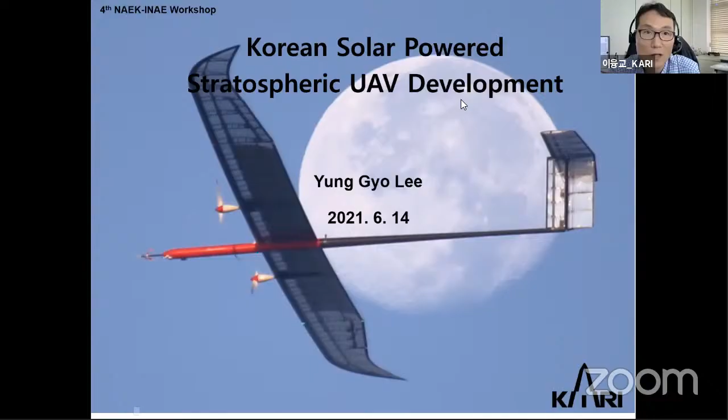Why do we use solar power for HALE UAV? For long endurance and eternal flight, regenerative solar energy is essential. Also at high altitude, electric motors have no performance degradation, so we use electrically powered systems like battery, fuel cell, and solar cell. Our UAV will be used for telecommunication in the stratosphere, weather observation, disaster response, and border watch.

In other countries, EADS developed a vehicle that flew 25 days in Arizona in 2018. It is designed for internet service with laser communication. Its wingspan is 25 meters, and solar cell and lithium-ion battery are used.

Also, HAPSMobile designed the Sunglider. The purpose is also telecommunication, and last year it succeeded in telecommunication at the stratosphere. Its wingspan is 78 meters, and solar cell and lithium-ion battery are used for the power system.

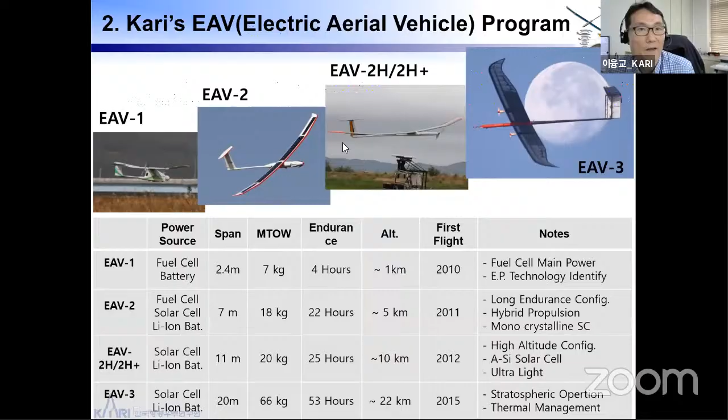This is EAV1. The power source is a fuel cell. The purpose is technology identification for aircraft electric propulsion. We modified this from an existing platform, from lithium-ion cell to fuel cell.

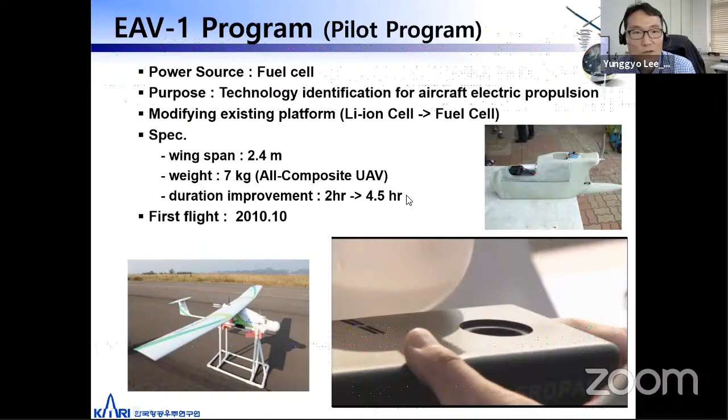The wingspan is 2.4 meters and the weight is 7 kilograms. It's all-composite UAV; all EAVs are composite UAVs. The duration improved from 2 hours with a battery to 4.5 hours with a fuel cell. The first flight was done in 2010.

This is the fuel cell and also the hydrogen generator. Adding water to a boron compound will generate hydrogen. So we use a bungee

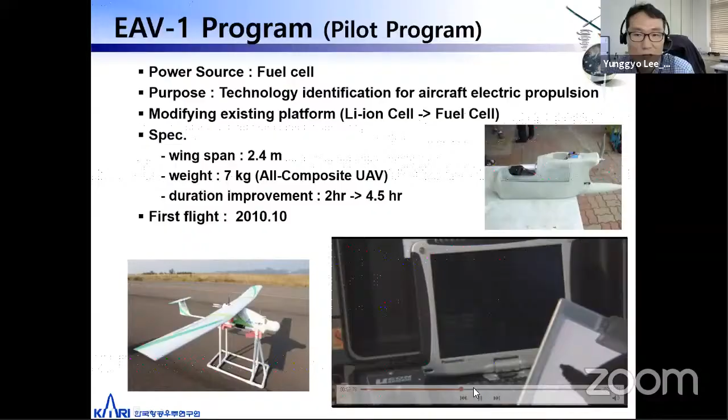takeoff like this to reduce runway usage. So EAV, all the EAVs, don't have any landing gear, so it just uses a wire skid under the fuselage and under the wing.

This is EAV2. The power source is solar cell, fuel cell, and lithium-ion battery. The purpose is a concept demonstrator of a hybrid power system. The wingspan is 7 meters, weight 18 kilograms, and duration is 22 hours.

The first flight was in 2011 - this is a typo. And in 2012, it flew for 22 hours and 13 minutes.

EAV2 also doesn't have any landing gear, so it lands with the wire skid under its wing. The speed is so slow, so there's no damage when it lands like this.

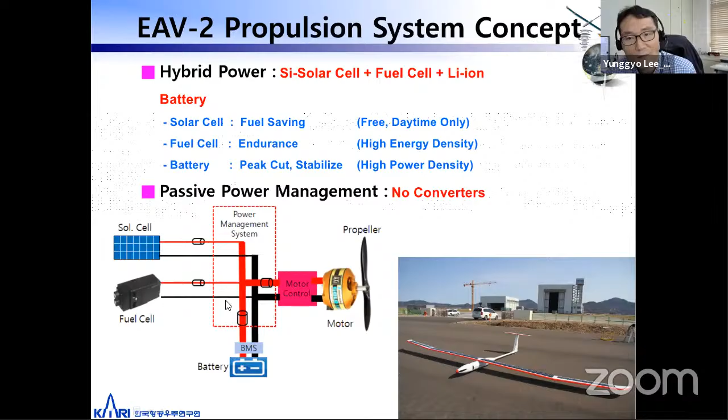Ground tests consist of these things: prop wind tunnel test, solar cells on the wing deflection test, and the power system, also a 24-hour integration test.

Now this is the 2H program. H means high altitude. Power source is solar cell and lithium-ion battery. This is a concept demonstrator of a HALE system. Wingspan 11 meters, weight 20 kilograms, duration is 25 hours.

EAV2H is a single-prop version, and the 2H Plus is a twin-prop version. The first flight was in 2012, and it flew 25 hours in 2013.

Other EAVs used a monocrystalline silicon solar cell, but in this version it used an amorphous solar cell on Mylar wing skin. It has a low-drag aerodynamic design, and ultralight structures were also applied.

Also, 18650 battery is used. The energy density is about 210.

Ground tests are like this: structural load test was done for the wing, air data system calibration was done in the wind tunnel, propeller wind tunnel test was done, and a 24-hour integration test was also performed. It has used omnidirectional combined antennas.

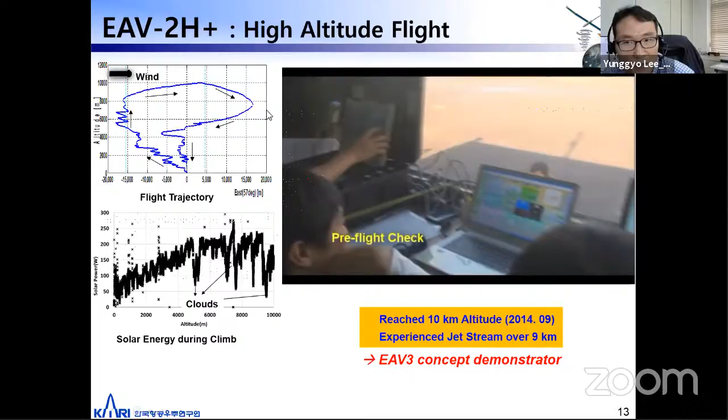Now this is EAV2H flight to 10 kilometer altitude. So it reached 10 kilometers in 2014, and it experienced a jet stream over 9 kilometers in Korea.

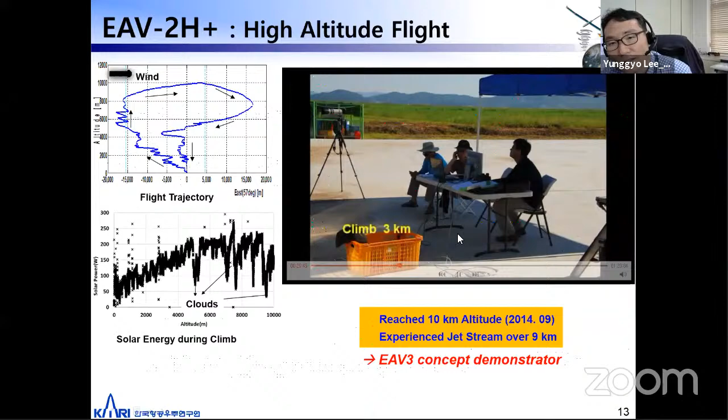This is EAV3 concept demonstrator. We have the camera on board, and some pictures were recorded on board.

Now this is the EAV3 program. EAV3 uses solar cell and also lithium-ion battery. The solar cell is a single monocrystalline silicon solar cell. The purpose is stratospheric operation, and we have constructed 3 EAV3. This is the spec of number 3: wingspan 20 meters, weight 66 kilograms, max altitude 22 kilometers. The speed is from 25 to 43

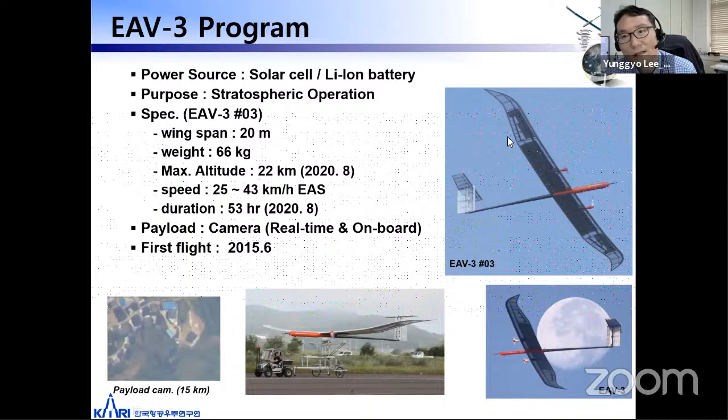kph EAS. The duration was 53 hours last year. The EAV3 0102 - this is the EAV3 0102. The EAV3 03 has more solar cells, also a bigger fuselage.

One is a lithium-ion battery made by Amprius of USA. It has about 390 watt-hour per kilogram of energy density. And the other version used lithium sulfur battery made by LG Chem of Korea. It has an energy density of more than 400.

Through the component environmental test and also BLDC motor development, and also high altitude propeller design, the EAV3 has flown to 22 kilometer height. The test condition was negative 70 degrees Celsius, and the pressure is 1/20th of sea level

atmosphere. The solar cell panel is tested in the environmental chamber. Also, battery cell and the pack inflate and deflate during the flight, so they have gone through pressure testing in the pressure chamber.

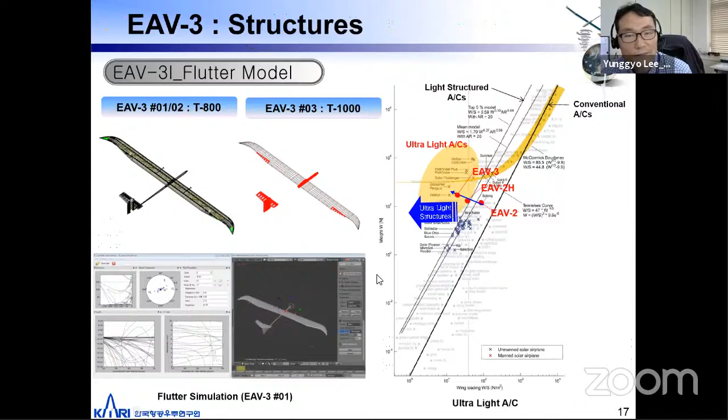Okay, we also went through the flutter simulation. Also, we did a steady load test, propeller wind tunnel test, and also double redundancy air data system. We have 2 AOA sensors and 2 AOS sensors and 2 pitot-static systems. And we have gone through the durability test.

In the stratosphere, temperature is negative 70 degrees, pressure 0.05 bar, and density is 1/15th of mean sea level value. So in the lower part of the stratosphere, the temperature grows up when it climbs up.

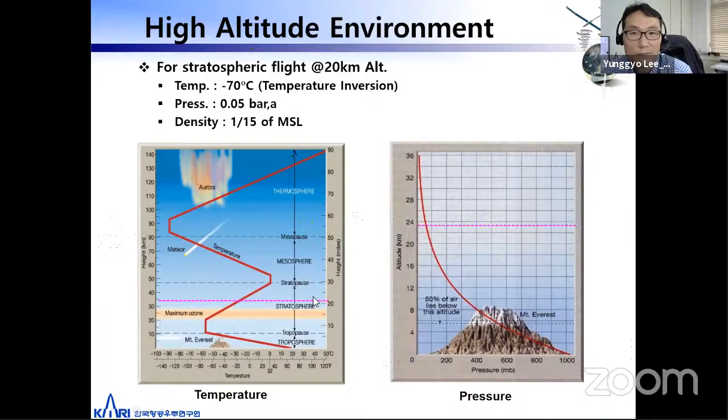Now let's enjoy 2 minutes of video. This is flight testing. This is our Goheung Aviation Center.

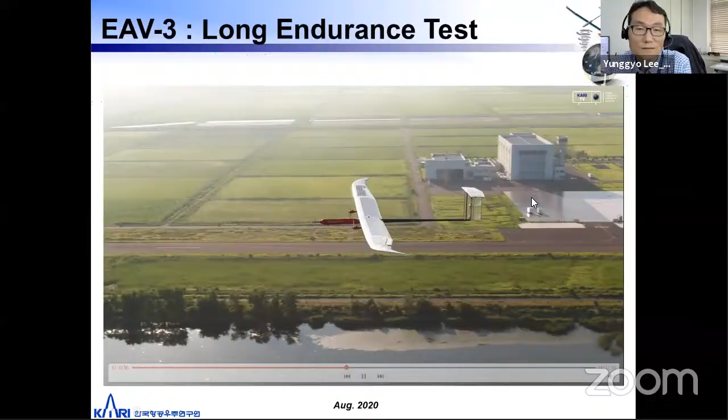Tracking antenna for C-band communication.

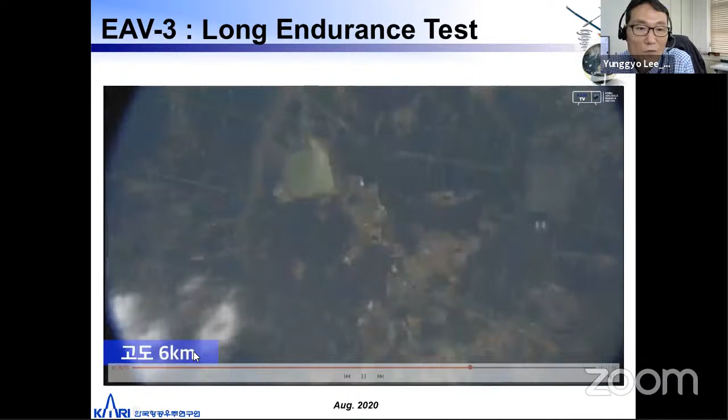Altitude 6 kilometers, from onboard the camera.

Okay, the ground control system is like this. The altitude is 18.5 kilometers, we have reached it. Also, propulsion system monitor, the onboard camera, and Sorok Island taken from 18.5 kilometer altitude.

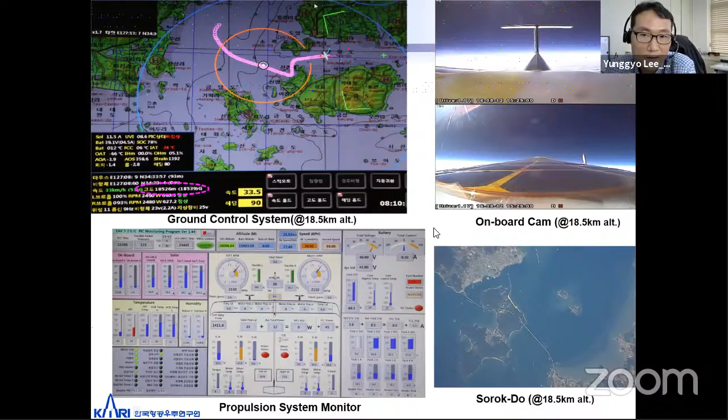Now, the achievements from EAV1 to EAV3: the endurance from 4.5 hours to 53 hours, and also the altitude from sea level to 22 kilometers last year. So we have made many achievements.

Now, EAV future plan. Next step for year 22 to 25 is planned. The target is a 1 month continuous flight over 12 kilometer altitude, totally in stratosphere. The wingspan is 30 meters. The weight should be under 150 kilograms. The payload is enlarged, it's 20 kilograms. It's a kind of a very big payload for this type of aircraft.

And we will apply satellite communication for wider area operation. To do that, we have to minimize power consumption, and also weight reduction is very critical. So structural weight reduction should be under 50 kilograms with a 30 meter wingspan. To do that, new structural concepts should be applied, and also T800, T1000, or maybe hopefully T1200 carbon fiber we will need.

I'm going to talk a little bit about some of the work that my students and we have been doing here at the Indian Institute of Technology, Kanpur. This picture is from one of our very iconic buildings, the Central Library, which was also released as a postal stamp some time ago.

As you may be aware, India has done quite well in at least two domains, nuclear and space. As was also mentioned in the opening remarks by the Honorable President, we launch satellites for other countries as a commercial venture, so it's a fairly successful program. One of the key things is the low cost, which is an advantage.

There's always this tussle between rockets versus air-breathing engines. Rockets are a little bit easier to put together, but with air-breathing engines you have to collect air, undergo combustion, and then perhaps also reuse them. Just to give you a number, air-breathing engines overall can be about 80% lighter, and therefore they offer a very economic advantage over rockets.

So India has a very ambitious program to go ahead with a two-stage to orbit system, wherein you take off like a space shuttle, and there are two stages. At some point, you jettison one of the stages, and it comes back and lands as an aircraft. The other part actually goes ahead, and then you can deploy a satellite. Once that is done, that also is retrieved, and the system is completely reusable.

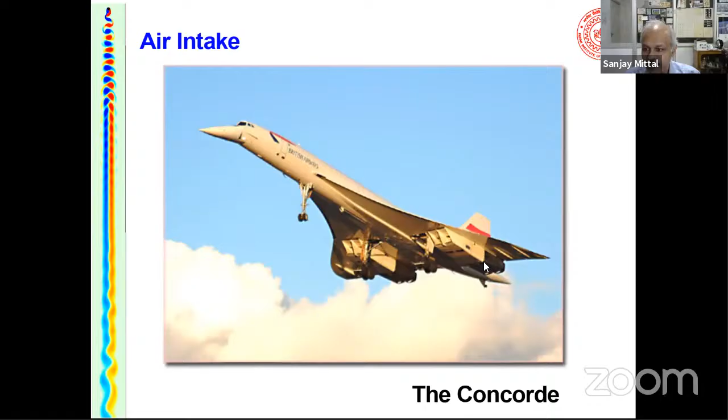They are passive devices wherein they just collect the air from the atmosphere and transmit that to the engine. So it seems very simple. Here is a close-up view of these 2 intake ducts.

The challenge for an air intake is the following. First of all, I have an engine at the downstream end of these intakes, so I must have almost a uniform flow at the engine. Otherwise, there could be heavy distortion of flow, and that would lead to loss of efficiency.

The second one is that I must slow down the air so that I can have combustion inside my engine. If my aircraft is traveling at a very high speed and I allow the air to get into the combustion chamber at that high speed and put fuel in it, I will not be able to stabilize the flame. The flame will blow out, just like a candle will blow out if you put the candle on top of a truck and speed your truck. So essentially you have to slow down the flow that comes into the combustion chamber so that you can have efficient combustion. That's the job of an intake.

Again, two jobs: one is to supply air of enough mass flow rate at low speed, and the other is flow uniformity at the engine.

Here is a schematic of what a typical reusable launch vehicle which uses air-breathing propulsion would look like. On the vehicle at the belly, there would be this engine, integrated with the aircraft. Through a set of shocks shown in this schematic, the flow slows down, and then you probably have another set of shocks.

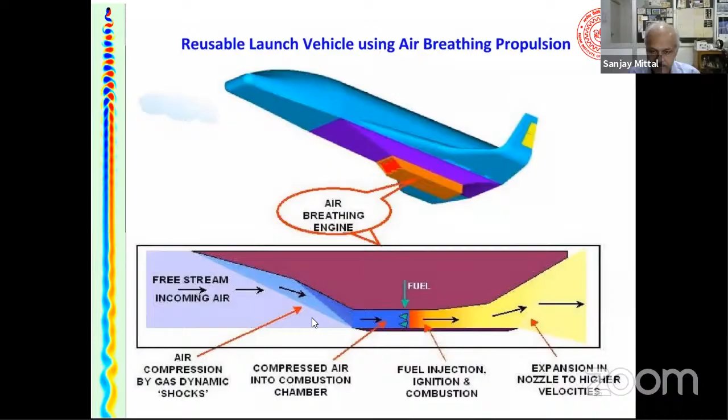There are several types of air intakes in aircraft engines. There could be an external compression intake, wherein the shock systems are completely outside the engine and they slow down the flow. Or you could have a completely internal compression system wherein all the shock structures are inside the intake. And the most likely one to be efficient at high Mach numbers is the mixed compression, wherein you would have a mix of both external and internal compression.

So I'm going to show you some results for our analysis of a mixed compression intake, which offers a very good potential for these flight vehicles.

Before I do that, I just wanted to show you some ideas of operation of these intakes. Here is the schematic. There is a high speed flow coming in from left to right, and this is the center body of the engine, shown in purple color.

So you have these shock systems where the flow slows down. This region we call the throat because this is the minimum area region of this device. That's called the throat, as the name suggests. We would typically have a normal shock somewhere in this system, and we would like it to be as weak as possible to reduce the losses.

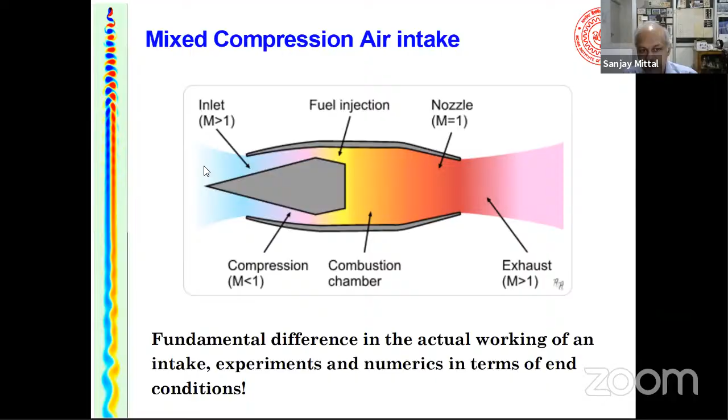Being a university, we chose a geometry available in open literature. This was tested long ago by NASA. It's a double ramp intake, a 7-degree ramp followed by a 14-degree ramp. This is the cowl, and this is the ramp, with flow going from left to right.

The first calculation was done assuming no viscosity, so we used Euler equations. Some finite element calculations were carried out, and we obtained a flow. Then we carried out viscous calculations by turning on the viscosity, and what was found is that the viscous effects really cause a problem in this flow.

There is massive separation because of this shock, so the boundary layer separates. The color coding here is red denoting high Mach number - that's 3, the inlet Mach number - and blue is close to 0, with shades in between.

So you get massive flow separation, and very little mass flow rate through the engine, even when the outflow is supersonic. We have not even applied a back pressure, so there is no combustion right now, and still this is not performing well.

One way to resolve this problem is to use boundary layer control. Typically what is done is there are some holes in the ramp and the cowl - it's a porous material - and you remove some air from this, perhaps using it for air conditioning or cooling. By doing that boundary layer control, you can actually prevent the flow separation.

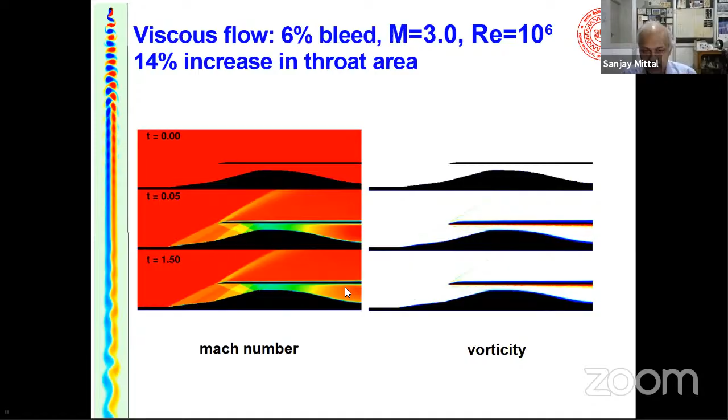And in fact, your engine will not be able to generate thrust. So this is a big no.

So you want to analyze how well your intake is performing for different bleed ratios, for example, and other conditions. If you're willing to do a very high bleed, let's say a 27% bleed, then your engine would actually do quite well at very high back pressure ratios. But then if you go beyond a certain number, the mass flow rate is extremely poor.

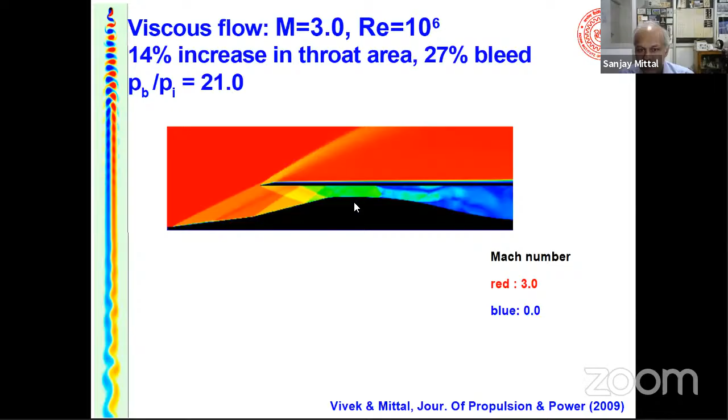So I want to show you one case which is on the verge of being unstable. You can see here it is very close to the critical operation. That's the throat of the engine. There's a back pressure. As you'll notice, we're applying bleed, so there are very small Mach waves on the ramps. But more or less, the flow upstream of the throat is steady. But then there's major flow separation and unsteady activity downstream, and you can see these shocks which are kind of dancing back and forth. But it's still okay. This is a reasonable situation, and the pilot can still use the aircraft.

If you increase the back pressure even further, you can get an instability which is typically called buzz. Just to demonstrate what a buzz looks like, I'll create a sound - it's almost like a honeybee creating a buzz, bzzz, something like this. So it's the shocks traveling back and forth. Essentially, the whole duct of the air intake acts like an organ pipe, and you can get standing waves which lead to this acoustic response. We have two kinds of buzz, a little buzz and a big buzz, and both are driven by superharmonics of these modes shown here in the pipe.

So here is an example of a little buzz. Notice we started off with a low back pressure ratio, and then as soon as the back pressure ratio was increased, this mass flow rate with time shows a very periodic type of response. You get a high mass flow rate, then it becomes low, then it rises again. So it's a very periodic activity, and that's because these shocks are going back and forth.

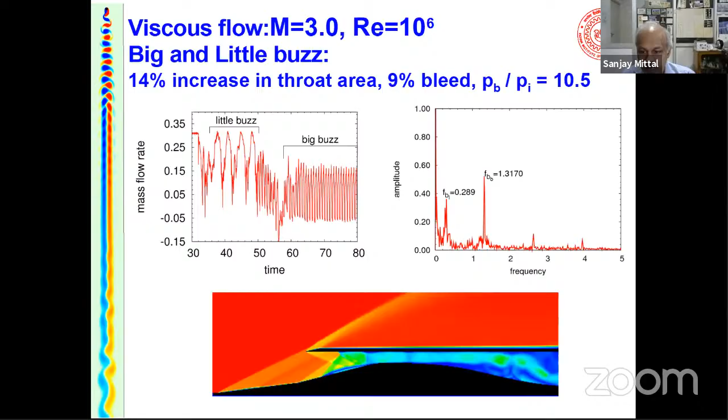You could also have a situation wherein you could have a big buzz and a little buzz following each other. So this is an example of a little buzz followed by big buzz. Initially you would have a low frequency response, and then eventually you would get a high frequency response of the mass flow rate through the engine and the related forces.

I have a few more minutes left, so I'll just very quickly show you some other intakes that we are doing. There are other intakes in aircraft that are used, for example, the Y-duct intakes. You could have a situation where you have one engine being supplied by two air intakes, much like our nose, where we have two nostrils supplying one air column. Or of course, you could have two curved ducts supplying one engine each.

So simulating air through these curved ducts is yet another challenge of how you supply the air to the engines efficiently. So we chose this model problem of two ducts which are joined together at the merger section.

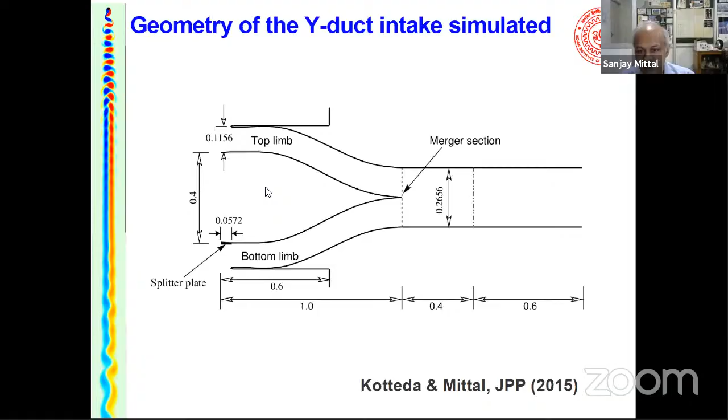And then we are going to look at the effect of the pressure ratio. The engine is located downstream and the air comes from the left. We are interested in what happens at different side slip angles when the air is not coming directly, when the aircraft is side slipping, and of course different pressure ratios.

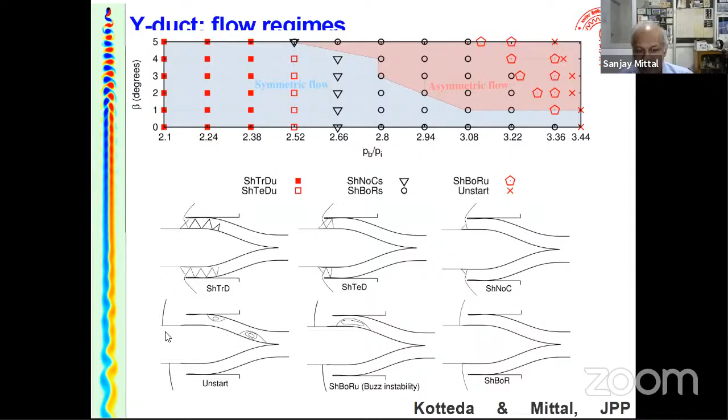And this would lead to a buzz instability, wherein flow would come in through one of the ducts and actually leave through the other duct. And finally you could get an unstart. So again, you don't want to be in this regime.

So here, the side slip angle is 5 degrees. The aircraft is actually at a side slip angle, so it's getting more mass flow rate through the lower limb as opposed to the upper limb.

Here is a close-up picture of that situation. As you will notice, flow comes in through the lower limb, and in fact it curls around and leaves through the other limb. So one of the limbs shows a negative mass flow rate, while the other shows a positive mass flow rate, and you get very little flow through the air intake.

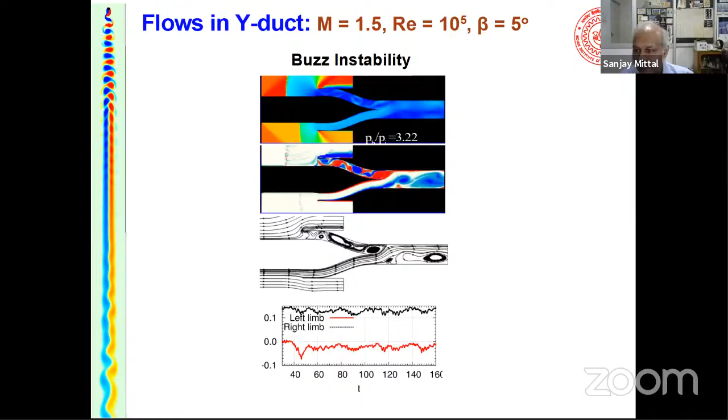And this is not recommended for a real operation, but as a design engineer, you would like to know how the intake behaves so that you can avoid these uncertainties even in the testing phase.

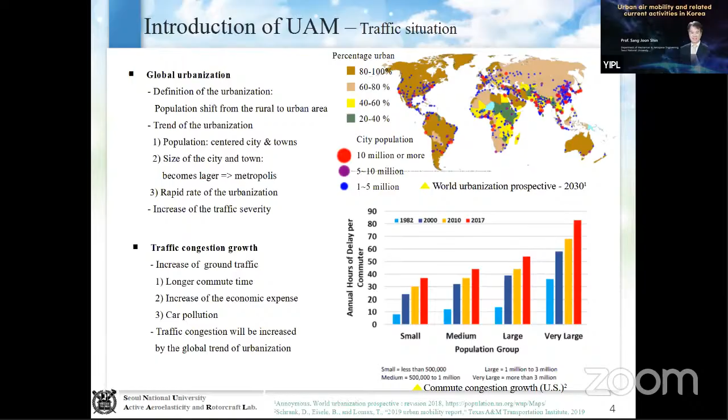Now I'd like to introduce some activities currently initiated in Korea. People in Korea started the business about eVTOL and UAM. They started the business about UTM, the UAS, unmanned air system transportation or traffic management. It's been a few years since they started new research plans and projects about this UTM, and by now they've made significant results in developing and establishing it.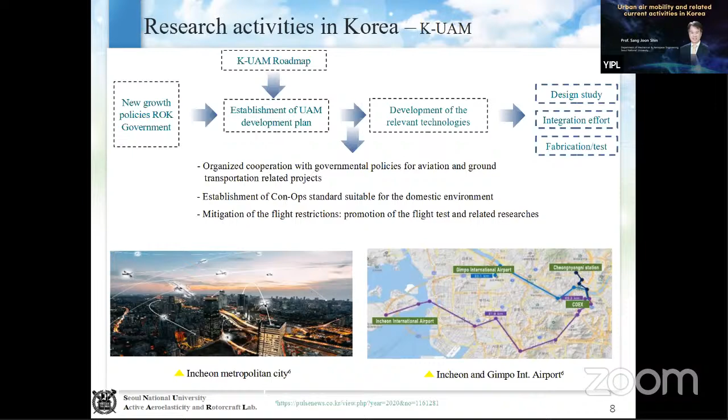Now there are a few activities directly related to UAM or eVTOL in Korea, either in government sectors or private sectors. As a matter of fact, it is quite famous and prevalent, this new transportation in Korea, but the government effort or financial plan is not clearly established yet.

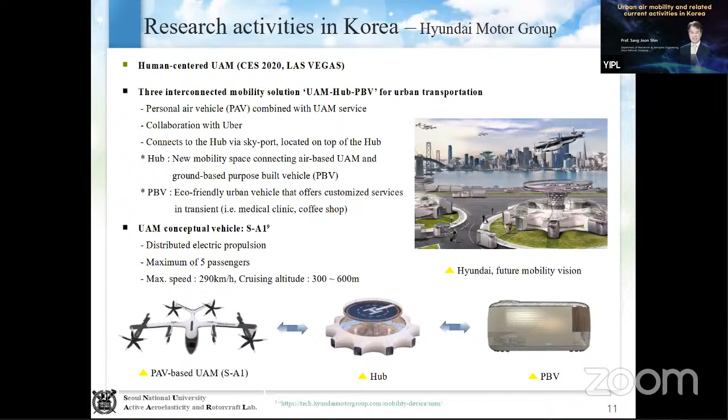The other industrial effort done in Korea is by Hanwha Systems Incorporated, in a way quite similar to Hyundai Motor Group. Hanwha Systems built a common invested corporation in the United States and has been collaborating with an international industry there, building a new prototype called Butterfly. Their plan is to complete it within the next few years, and as well as flight vehicle development, they will also make efforts on regulations.

Those are examples of what's been going on in government sectors and industrial sectors in Korea. But even though it is quite small and in the beginning, in academia, Seoul National University started a new research project related to UAM.

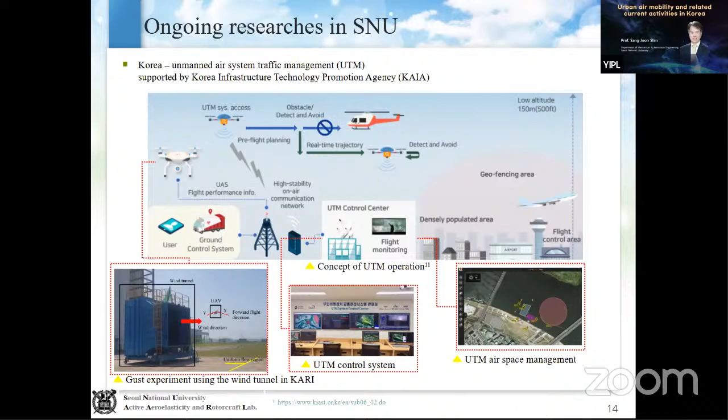The other one is a new research center recently approved by the Ministry of Science and ICT in Korea, mostly focused on flight vehicles. Six universities will be joining in this seven-year research program, and there also exist international collaborations with Boeing, Airbus, and NASA Ames.

Under that program, the aspects within vehicle technologies will be focused on, and the seven-year research period will be separated into Phase 1 and Phase 2. During Phase 1, basic research efforts will be attempted, and during Phase 2, those various aspects will be collaborated and integrated, focusing on a final prototype designed using artificial intelligence based simulation programs.

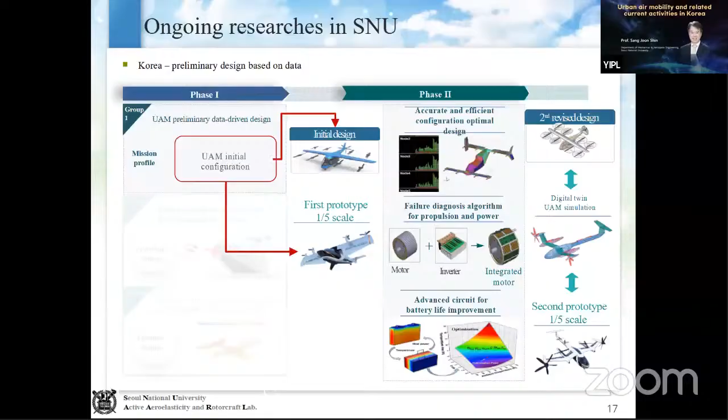Under that Phase 1 and Phase 2 program, many different disciplines will be expanded and integrated in the final result, such as preliminary design, aerodynamics, structural, vibration, acoustics, and flight condition controls. These efforts will be collected and collaborated with the existing UTM activities going on in Korea.

As you see, the eVTOL or UAM aircraft vehicle will be similar to rotorcraft in terms of vertical takeoff and landing, and many existing technologies related to rotorcraft in Korea will naturally and automatically be merged into this effort.

And this is the final construction of the ideal and imaginary flight vehicle, which will be done by the integration of all those efforts inside the research program.

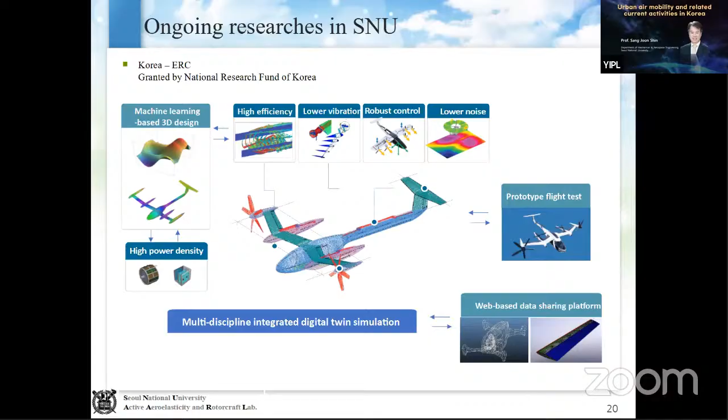Now this is the small conclusion of my presentation this afternoon. Even though the aircraft and flight vehicle is an integration of many different disciplines, many other research efforts will be required, such as infrastructure, regulation, and operation. Within the research center and within Korea, there are many activities and research plans being done in relation with UAM and eVTOL.

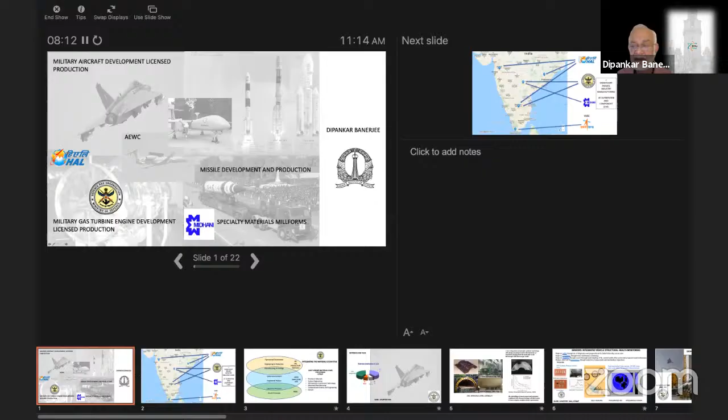Okay, right, now it's moving.

These organizations are based primarily in the southern part of India, in these cities. They're all supported by significant private industry manufacturing, both at the subsystem and component level, but systems design is done essentially by our government organizations, such as HAL, DRDO, and the Indian Space Research Organization.

We have made significant efforts to integrate the materials ecosystem, that is, integrate manufacturing technology and engineering to production, with the systems development environment and with laboratory research in several areas. The Aeronautical Research and Development Board of India supports this integration through research programs which address structural materials, surface engineering, life extension science and technology, advanced manufacturing, computational modeling support, and sensors.

Our flagship program of the Defense Research and Development Organization and HAL is our light combat aircraft program, also called the Tejas. This aircraft is called the Tejas. It has received full operational clearance from the Indian Air Force.

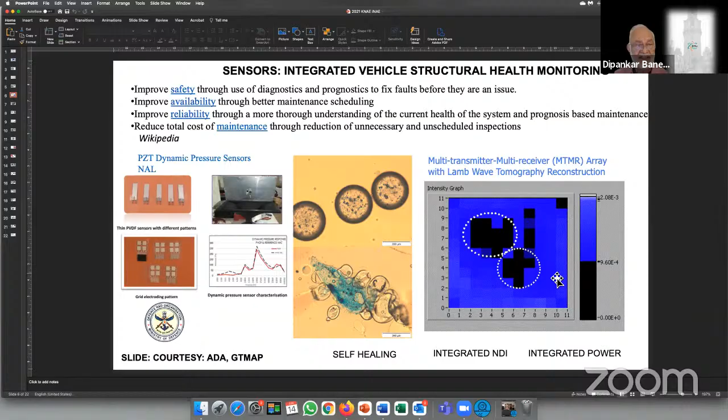We have learned how to design with composites. For example, when such an aircraft undergoes combat, there is an extremely complex loading system that the composite fuselage and wing meets, so we have learned how to design with composites to handle these very complex loading efforts. In designing, we have also established capability to test full aircraft structures on the ground with loads that simulate the flight conditions in the material.

Other critical materials that are used in the light combat aircraft are, for example, high-strength titanium alloys, which are used in such parts, and quite uniquely, shape memory couplings that couple these assemblies, these pipes for the transfer of pressurized fuel and air, which is a very important part of the hydraulic system of the aircraft.

The aero engine environment is an extreme environment for materials. Revolutions greater than 10,000 RPM lead to fatigue. High temperatures lead to oxidation. Bird, sand, and ash ingestion at high velocities lead to various forms of impact damage, corrosion, and erosion.

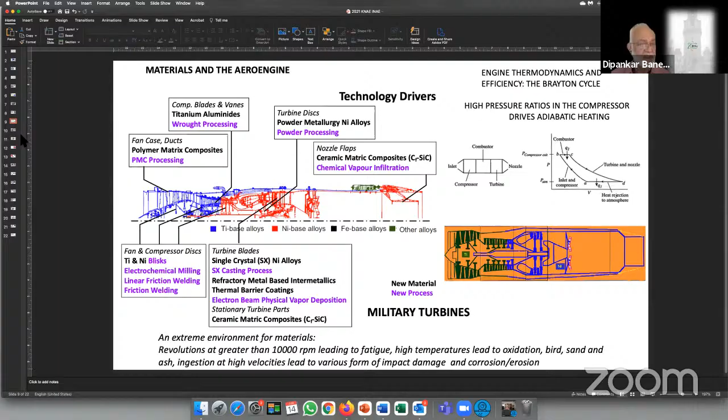The turbine materials are the most critical parts of the aero engine. We have today both research and manufacturing capability of single crystal nickel-based material, directionally solidified nickel-based alloys, equiax components, or such integrally cast structures. The entire process, starting from die design to core manufacture and injection, because these blades are hollow, and then ceramic molding and casting processes, have been developed in our laboratories and are under production also at Hindustan Aeronautics Limited.

In production, we support this process capability, this manufacturing capability, by materials research of such superalloys. I show you examples of atomistic mechanisms of materials deformation during creep of such materials, for example the shear of the two-phase structure and the Ni3Al structure to form various kinds of faults. The analysis of those faults in terms of segregation is done by atom probe tomography techniques or by very high resolution electron microscopy techniques, and the understanding of these processes informs the alloy design efforts in our laboratories.

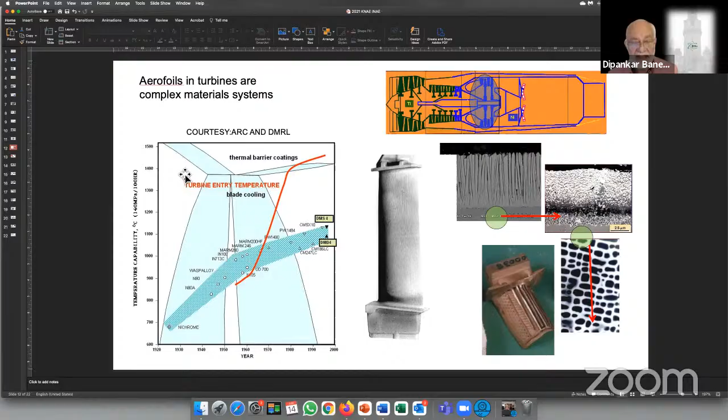We have research supporting the understanding of the mechanics of such material systems, so small volume testing to understand the micromechanics of mechanical behavior at the ceramic coatings, at the oxidation coatings, and in the substrates, and the ability to combine this micromechanical behavior at each portion of the structure into a whole material system response in relation to the dynamics of the aero engine.

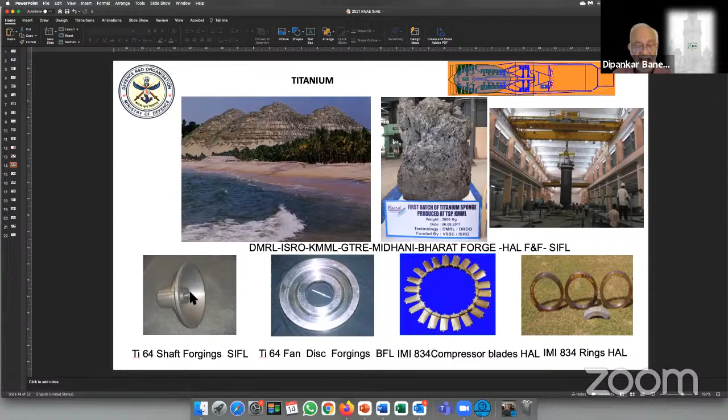Titanium occupies the front parts, the fan and compressor stages of the engine. We have some of the largest titanium deposits in the world on the western coast of our country, and we have developed technologies to extract titanium from these ores at production scale. We have the capability at Midhani to transform titanium and its alloys into various components required in aero engines. Supporting this manufacturing capability is our research on modeling-based processing microstructure property linkages, which are extremely important to improve the efficiency and yield of the manufacturing processes.

For example, the complete die design, the materials response at different strain rates and temperatures, the flow of material into dies, coupled with an understanding of strain rate and temperature at different portions of the component, and the microstructural inhomogeneities that this distribution might lead to, and the assessment of the final component in relation to all these operations.

The understanding of process capability is supported by the understanding of plasticity in these two-phase structures, microstructures that constitute titanium alloys. So the determination of local properties in such structures, the critical resolved shear stress of various phases through nanoindentation techniques combined with FEM analysis, crystal plasticity modeling to understand the strain development and strain partitioning in such structures, coupled with experimental understanding of strain partitioning. All of these together provide models to understand the mechanical behavior of such structures, for example under fatigue loading.

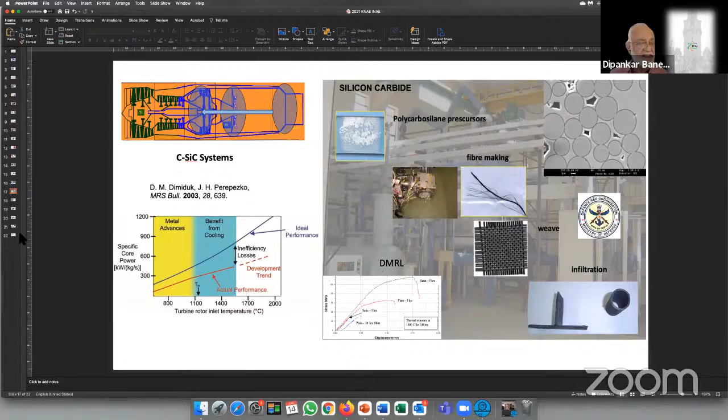Carbon silicon carbide systems form a critical part of the end stages of the aero engine. Increasingly, efforts are being made to use silicon carbide composites in the turbine section to replace cooled turbine blades, because the cooling process, extracting cooling air from the compressor, results in losses of efficiency in the engine. We have made efforts in understanding the entire process of composite production and the supporting characterization of microstructure, of coatings for environmental resistance, and the failure mechanisms of such materials in components such as this. Here is an example of a convergent divergent nozzle flap in our aero engines made with carbon silicon carbide.

We also, in an entirely different effort, support the development of gallium nitride-based high-power, high-frequency devices, because these are important in various electronic devices, such as transmit-receive modules in radar systems.

So we understand device performance in terms of the underlying materials science, which looks at the perfection of the atomic structure across the active layers, as well as the strain profiles and defect structures, and so on, to understand the performance of these devices.

We are moving towards an integration of all this capability by combining our capability in materials processing performance databases with advanced manufacturing techniques such as additive manufacturing, including topology optimization, as well as gradient structures for improved functionality of such products.

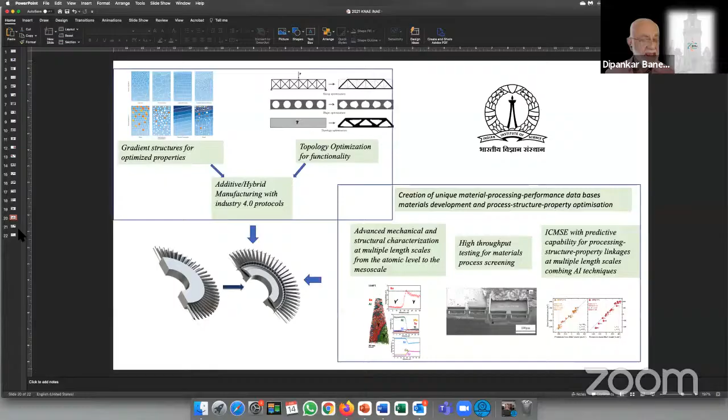Supporting this manufacturing effort are initiatives supported by the Department of Heavy Industry of the Government of India towards Industry 4.0 capability. For example, we have centers of excellence in advanced manufacturing at IIT Kharagpur and the Indian Institute of Science, which aims to develop smart manufacturing capability in a consortium approach with industry partners.

For example, at IISc, we are developing automation-intensive platforms, but also incorporating smart capability into legacy systems, which are labor-intensive platforms. Thank you very much.

I will end here. I've tried to describe to you our capability in these programs and the supporting research and development effort into such programs and our efforts to integrate this total ecosystem.

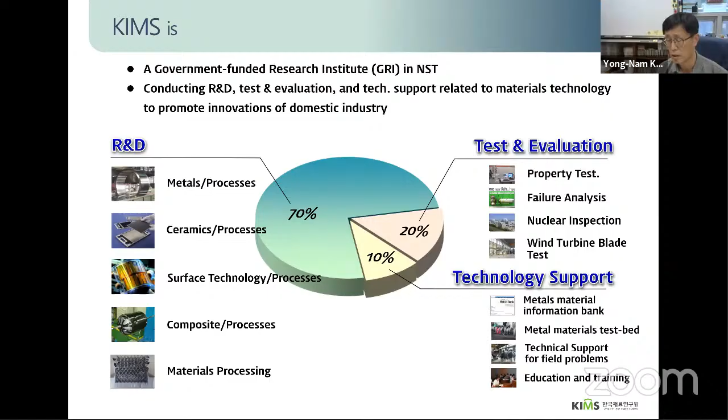Our research area covers metals, ceramics, powders, and composite materials, surface technologies, and material processing. I belong to the material processing department.

We became an independent institute last November. The English name is the same as in the past, but it has grown into the Central Institute for Material Research in Korea.

So we are in Changwon. KIMS headquarters is in Changwon, where I am now, located in the southeastern part of the Korean Peninsula.

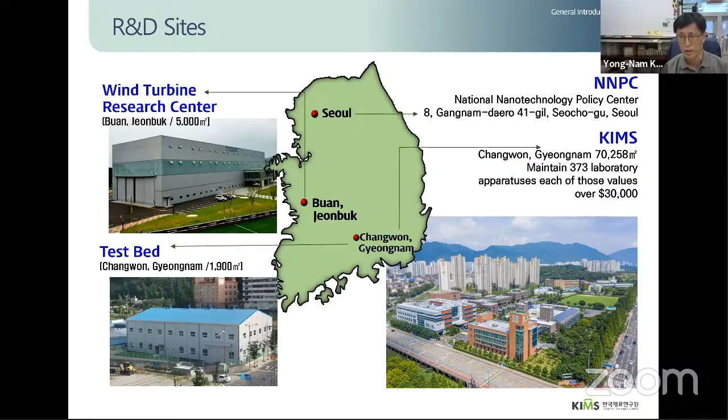KAI, Hanwha Aerospace, and KAL, the major three companies in Korean aerospace industries, are within a 1 hour drive from here. As of March this year, our employees number 663 and our budget is $110 million. My Aerospace Material Center has various machines for testing materials.

Most testing is focused on coupons and elements that require statistical analysis. For aerospace materials, fatigue and dynamic properties are very important.

We operate various hydraulic machines up to 1,200 kilonewtons. We have horizontal fatigue testers for environmental testing, thermomechanical machines for high temperature alloys, and tension torsion testers. We also run high electromagnetic fatigue testers and ultrasonic fatigue testers for high frequency testing.

In addition, we operate residual stress measurement machines. With these machines, we generate and produce material properties and element testing results for the KFX program. KF-X is currently under development in Korea.

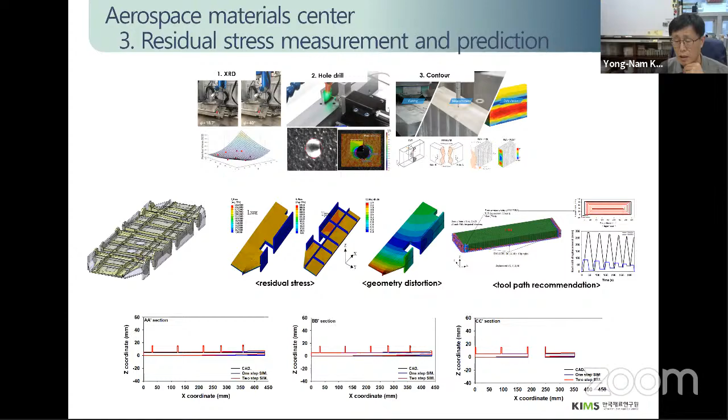So from now on, I will talk about Korea's aerospace material industry.

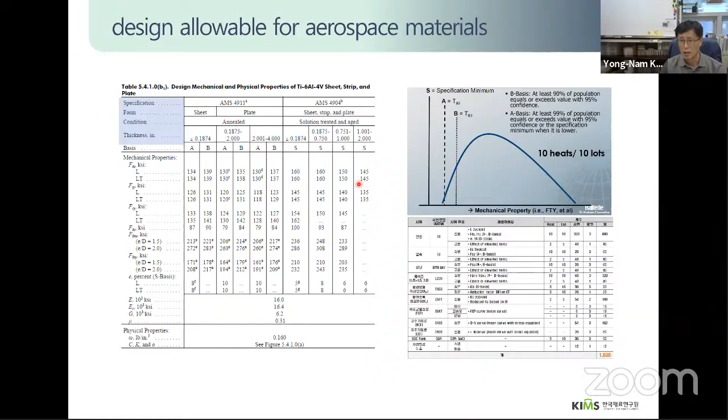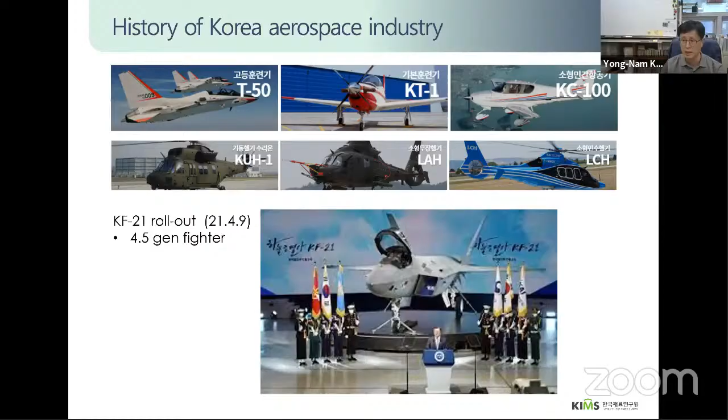Globally, assembly production capability has reached similar technical levels, but material and component production techniques have not. Depending on the amount of purchase, aerospace material parts vary in price and delivery schedule, which has significant impact on final competitiveness. We also experienced Japan's export regulations in semiconductors, so global supply chains can be very fragile and problematic. In particular, aerospace materials, which are closely related to defense, are subject to major export regulations.

Right now, aerospace material production in Korea is limited to production of 100 tons of aluminum extrusion. The first reason is lack of technology to manufacture aerospace grade materials. The second, and maybe more important reason, is that the domestic aerospace industry is very small, so it is not an attractive investment. Traditionally, the materials industry is represented by high risk and high profit. The narrow domestic aerospace material market is preventing development of aerospace materials.

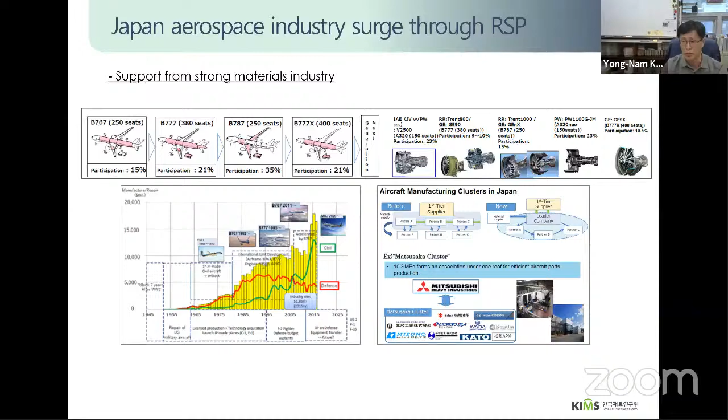But Japan is a good example I think we can learn from. Japan can be a lesson for Korean aerospace material industries. Based on strong material and manufacturing capability in Japan, they could create clustering structures involving material, parts, and OEM industries.

So I will briefly tell you about the demand for aerospace materials in Korea. Annual production of domestic aerospace material is very small, but we need a lot of materials. However, the development of aerospace material through government support and civil development by the private sector is underway.

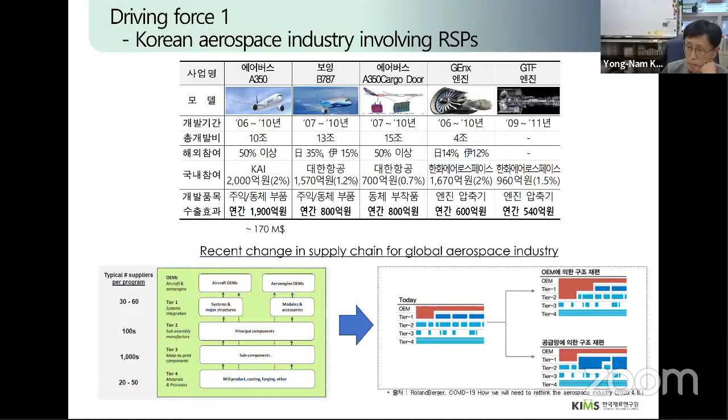The Korean government plans to support the aerospace material industries in many ways, and in the private sector, voluntary development between material companies and OEMs is underway. KIMS is one of them, helping and supporting industries in many ways. Why do Korean government and private companies show great interest in developing aerospace materials? The first reason is Korea aerospace industry OEM companies want to increase RSP, sales volume. In addition, there is a significant move to reshape the supply chain in aerospace industry, so Korean aerospace OEM companies eagerly want to make use of this situation. They seem to think that stable and cheap material supply is essential to make change. The second driving force is the Korean government.

You can easily guess what the Korean government thinks by reading newspapers. The Ministry of Trade, Industry and Energy announced an industry development plan, and the President's science and technology advisor gave a direction for developing space industries recently. Korea also declared participation in the NASA Artemis project.

The last driving force, I think, is future mobility development, such as UAM. There's a big market available in the future. UAM is aircraft. There are many startups, aerospace OEMs, and automotive industries designing and building UAM, but according to current strict regulation, it is classified as aircraft and should meet airworthiness regulations. So the material used in the future mobility industry is expected to be huge, and that is the driving force for Korean material industry interest in aerospace materials.

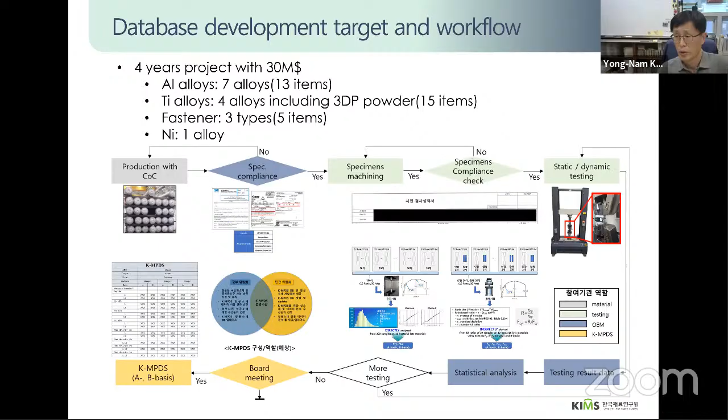In the last chapter, I will wrap up the presentation by explaining the recently started aerospace material design allowable value data development project. As told before, aerospace materials must obtain material properties following the regulations. In this project, we develop design allowables for aluminums, titaniums, fasteners, and nickels. We are trying to develop 15 different types of material data.

Did they start with a perfect plan for Mars, or has it come as a gradual development with constant challenges? I think it's a moment where Korean researchers and businessmen need a sense of mission, a 'go to Mars' kind of mind. I think this kind of mind is needed in Korean aerospace material industries.

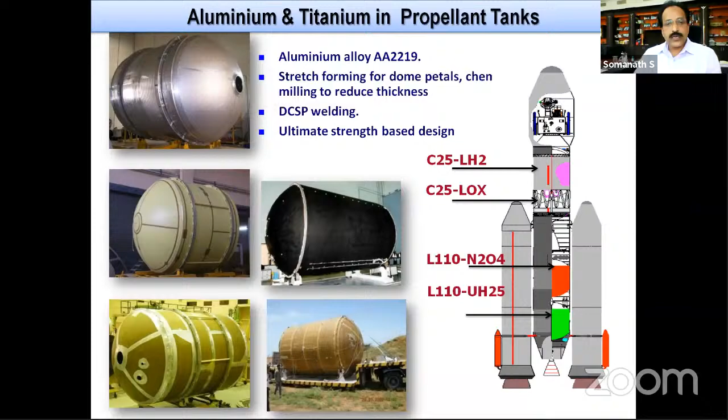For aluminum, primarily we use 2219, which is a weldable alloy for the manufacturing of propellant tanks, and also titanium for some of the propellant tanks and pressure vessels in the rocket. Composites are well used where light mass is very important for the upper stages, especially the fairings, the payload compartments, as well as the equipment decks that go into the rocket.

The materials for spacecraft propulsion vary in the form of mostly titanium varieties that go into the propulsion tanks and related components, and high temperature materials like columbium, C103 for making high temperature engines, and various steels for elements that go into the propulsion systems of the spacecraft.

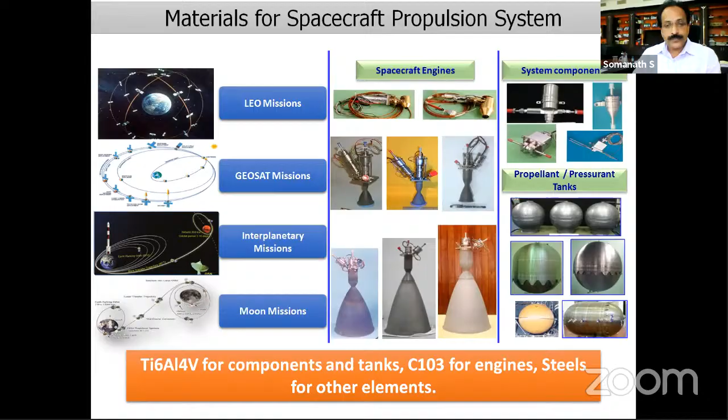Similarly, there are materials for cryogenic and semi-cryogenic engines. The engines are a very complex assembly, typically something like 50 to 80 types of alloys that make up an engine. We started by procurement in the early part of the program, but later many of these alloys slowly got indigenized with the support of industries, as Professor Banerjee mentioned. But still, many are being imported in small quantities, a requirement which doesn't substantiate the development effort in terms of large volume production.

Some very important ones are the copper, which we have realized for the thrust chamber where high conductivity is required. And it's not only the alloys that have been indigenized, but also the manufacturing processes into different shapes and forms that suit the engine manufacturing requirements.

Then I'll speak very briefly on the metallic materials and their current status. If you look at the key building blocks of the rocket motors, the solid boosters use 15CDV6 and maraging steel M250. 15CDV6 is not an Indian alloy, but it was indigenized in Indian industries, and we now have full end-to-end production capability, including forgings realized through the Indian forging industry. Maraging steel M250 development is very remarkable, with a large amount of work done.

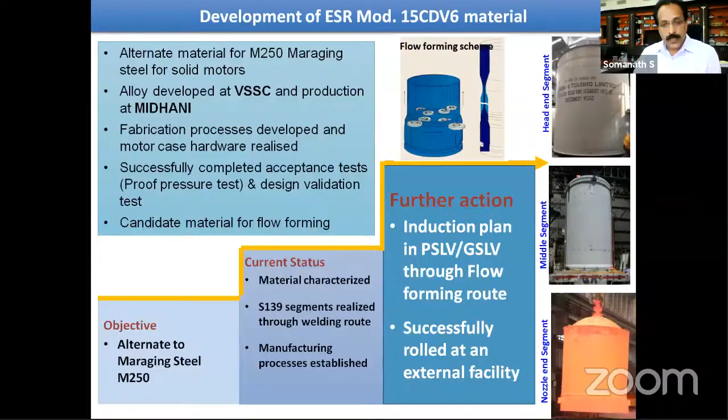Various facilities were established in industry, not within space institutions. Plate rolling facilities, melting facilities, and ring rolling facilities were established across various industries. These facilities now support production of various alloys for meeting aerospace quality requirements such as fracture toughness evaluation, development of filler wires and welding aspects, and specific ultrasonic quality requirements for these alloys.

The aluminum alloy indigenization was a very late program, but is now feeding benefits in terms of the ability to melt alloys and convert them into various forms like slabs in one industry, sheet rolling in another, rolling of rings in another, and converting them into forgings, rods, blocks and pipes in yet another industry. This industrial cluster currently supports all the requirements of these alloys for our program.

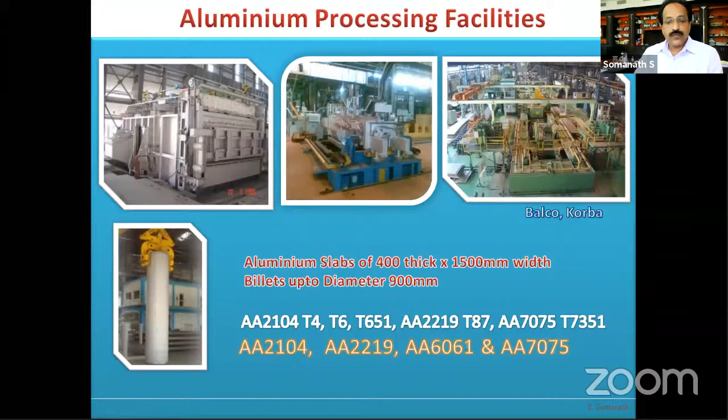Similarly, processing facilities were also established in various industries, including heat treatment furnaces and plate rolling mills. Billets up to 900 millimeters have been realized for meeting the large forging requirements for our big diameter boosters.

Titanium is another important element for the space program, starting with Ti6Al4V, the workhorse material for gas bottles and propellant tanks. These were later developed in labs, and the development of large-scale titanium started in MIDHANI. We established production of titanium sponge using the ores available through technologies developed here, and later sponge conversion to the alloy and required forms, realizing products a few years back. Now they have been inducted into the program of all launch vehicles and systems in a big way.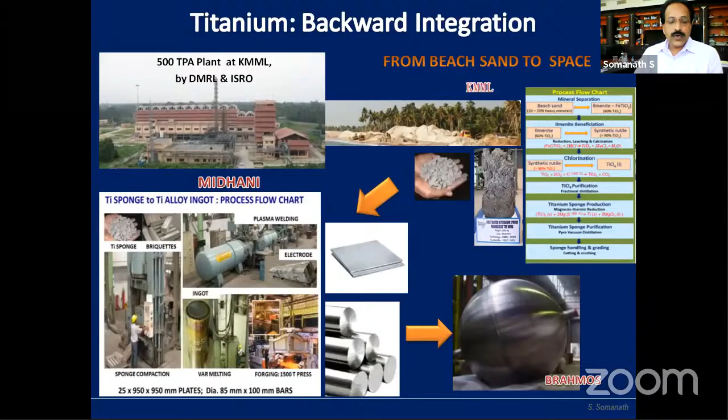Another important requirement was the indigenization of various elements for high temperature materials, such as columbium, the KC20WN, through production of hafnium and niobium in plants established in some of these labs of CMET and NFC, situated at Hyderabad city in India.

One of the important requirements of cryogenic engines and even storable engines were castings, mostly investment castings. Specifically for cryogenic and semi-cryogenic engines, casting requirements are mostly titanium superalloys as well as aluminum based alloys, successfully realized through various routes including melting and casting technologies, with proper quality of these forgings established over the years. This has been a very important input for realizing the engines within India itself.

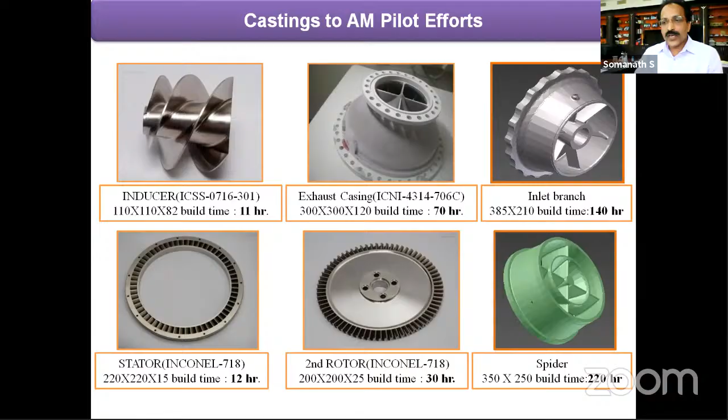Today, we are looking at manufacturing these castings through additive manufacturing routes. In later presentations, maybe today, we will discuss some of these accomplishments.

Now looking at materials very important for the rocket program, the high temperature materials. Our foray into high temperature material development started when we tested the space capsule recovery experiment way back in 2007, but the development program of various tiles like silica tiles, flexible insulation system, code bricks, and silica aerogel started over the years, and were injected into this program very successfully during the orbital recovery experiment. Later these elements were inducted into the reusable launch vehicle technology demonstration, launched in 2016. Over the years, we are trying to expand this capability to feed the two-stage to orbit reusable launch vehicles. The various elements which go into development of high temperature material, including the UHTCs, will be described in the following slides.

Coming to high temperature materials, future requirements are where the application temperature goes much higher than 1600, where there is a material limit, and how to create materials which can withstand up to 2400, already working around the globe through UHTC, is one of the focus leading research activities, where some of these materials can feed into creating hypersonic vehicles, elements into thermal protection systems, and also nozzle inserts which go into the rocket.

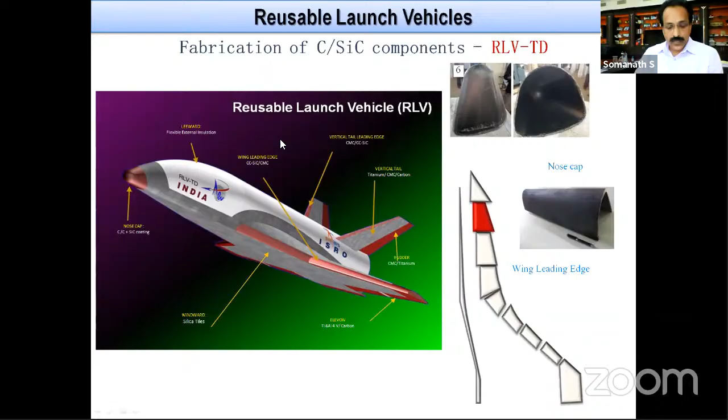We are now currently looking at manufacturing some of these elements for our reusable launch vehicle, where the nose caps and wing leading edges have been realized through various carbon form routes, but sintering as well as formation of these materials are currently going on within the facilities in ISRO.

The high temperature materials requirements are really demanding for vehicles like this, where we are looking at the hypersonic scramjet-based propulsion system for developing vehicles of this nature, where high temperature elements are very important for the combustion chambers as well as the external aerodynamic systems.

For example, in the scramjet powered hypersonic vehicle, the air intake ramps typically reach 1400 degrees. The combustor divergent region temperature goes up to 2200 degrees Celsius, where carbon silicon carbide UHTC coatings become very essential. This technology once developed will feed into various other elements of rocket systems, such as re-entry vehicles, nozzle throat inserts, and other building blocks of the rocket.

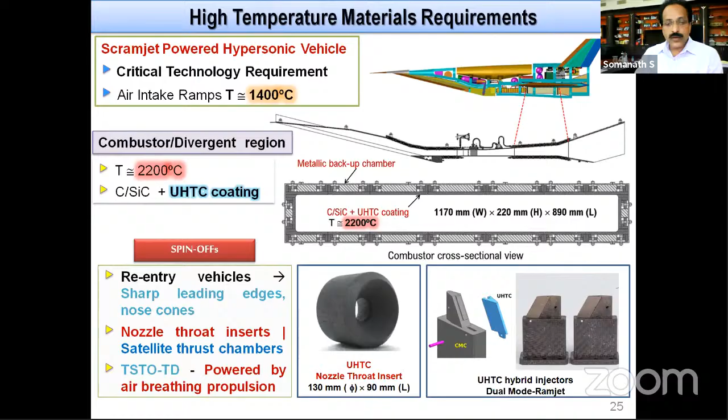Similarly, there are high temperature materials and regular alloys, but also special materials required to meet specific demands. For example, tuning fork materials that go into gyros, where a very narrow range of properties is needed for resonating vibrating systems, and symmetry of the modes becomes very important.

Another development is nitrogen alloyed martensitic stainless steels with carbide dispersion, developed for cryogenic applications. Titanium 2.5 SN ELI grade alloys are used for control of hydrogen required for cryogenic applications for helium storage. These were some of the typical alloys which have been developed after great effort.

Another important development was copper alloys for liquid engines, where forming this copper is very critical, and under different cycles of temperature, the accumulated plastic strains had to be limited. These copper plates were formed and alloyed on some Indian facilities, and have been successfully used in the cryogenic engine program, where thrust chambers with narrow chemically milled cavities and brazing have been successfully used with stainless steel for manufacturing these engines.

Similarly, for this engine manufacturing, another group of alloys was developed for brazing technology, for copper to stainless steel and various other elemental brazings for making injector heads and thrust preburner elements, and also some alloys for brazing kovar to alumina for making traveling wave tube amplifiers for spacecraft applications.

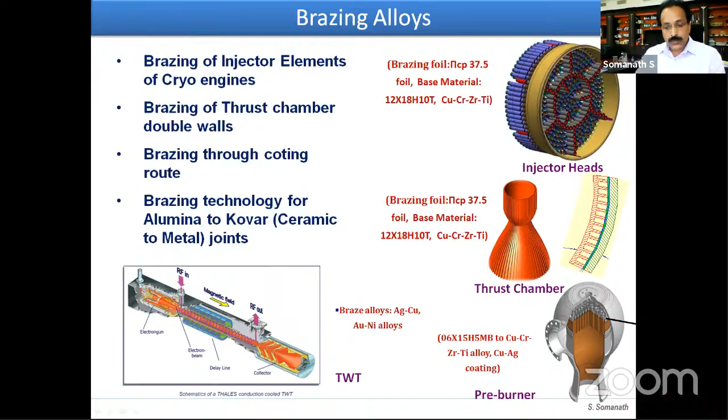In addition to the metallic materials, there are so many chemical materials required for the space program, which include thermal protection systems like silica phenolic, ablative systems, carbon disperse systems, dielectric materials, nylons, required for various applications. So there is a huge list of materials being developed to meet the space program's quality requirements.

Some specific materials that are very important: shape memory alloys, which go into manufacturing the unfurlable antenna and actuators for spacecraft, and then the super invar alloy, which provides low coefficient of thermal expansion required for mounting optical systems in spacecraft. These have been successfully developed through technologies available in ISRO and industry.

A group of people are working on electronic ceramics, which are very important for high frequency applications where RF systems are used. We look at high Q materials for KU band satellite multiplexers, dielectric ceramics for antennas and resonators, and various elements of RF systems, and ceramic green tapes have been successfully developed using industry interfacing and technology available in ISRO.

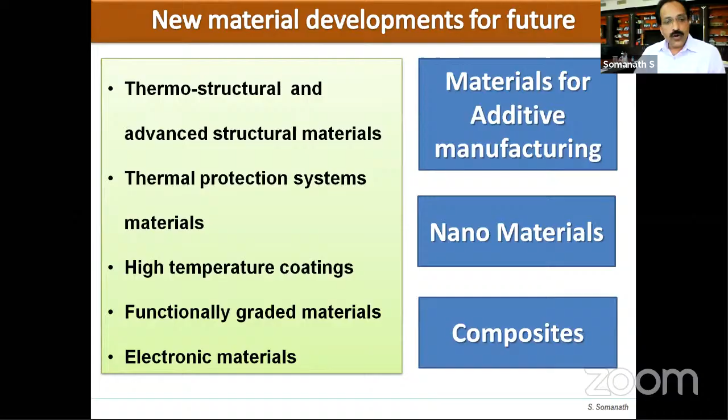Now looking at research into the future, various new material developments are there. They are into various groups for additive manufacturing materials, nanomaterials, and composites. Our focus is more on high temperature materials, coatings, functionally graded materials, and electronic materials.

Looking at the thermostructural domain, as I mentioned earlier, the thrust is in converting them into ceramic matrix composites which are near net shaped so that machining can be simplified, and also high temperature dense sintered product with zirconium diboride and hafnium diboride based CMCs, and also carbon composites with multi-dimensional capability.

In the thermostructural area, again, for a cryogenic engine, currently the material temperature limits are only up to 500 degrees centigrade, and we would like to increase it to something like 800 using these alloy developments. Similarly, for titanium alloys, beta titanium alloy development for gas bottles can bring significant weight saving and also high processability for these alloys for tank manufacturing.

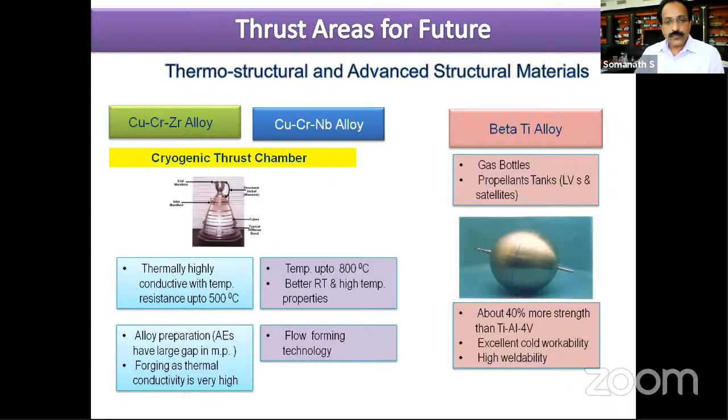In the thermal protection domain, there is so much development required to be undertaken, and currently research is going on manufacturing silica tiles in larger sizes, metallic thermal protection systems, ODS-based metallic TPS materials, and forming thin foils and sheets for manufacturing metallic TPS materials, carbon foams that can be used for high temperature applications with ablative capability.

In the nano, smart, and functionally graded materials domain, research work and developments are in the area of smart materials, smart material fluids, MR fluids, and also functionally graded materials production.

Now, we have quite a large number of thrust areas that have been identified. Some of the additional areas include development of titanium alloys that work up to high temperatures with creep resistant properties, development of high entropy alloys, and also use of extensive simulation tools, which are some of the very key areas in the current domain.

In the electric propulsion system, there are many new materials required to be developed, including thermionic emitter materials and also silicon germanium alloy for thermoelectric devices.

Band gap materials are required to be developed for high gigahertz, terahertz applications. Electromagnetic materials for high temperature, high power dielectric applications are also identified as a key element for recent developments, along with high hydrophobic flexible silica aerogel composites for various uses in thermal protection systems, internal and external to rockets.

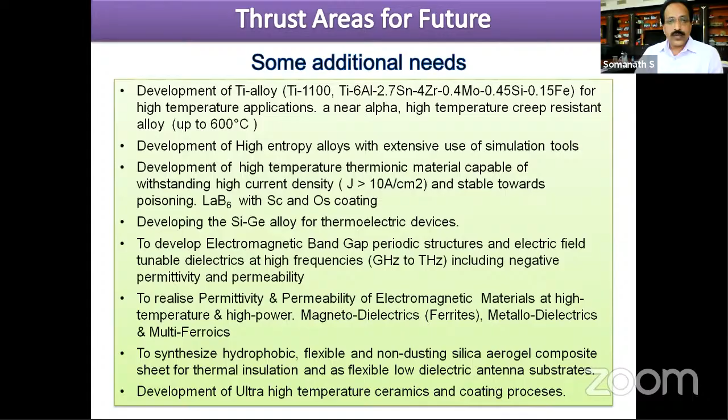And also, high temperature ceramics and coating processes are very important to be developed in the near term.

So in summarizing the most important material developments, what we see is that industry production in a cost-effective manner has not been achieved, because the demand for these materials is small and operation of industries to break even is not really achieved. So this is one goal we have set: to industrialize production and achieve cost-effective manufacturing and operation of these facilities by industries, through established space-qualified processes for consistent production, and also enabling industries to do R&D in materials development.

Currently that is being done within the organization. In my talk, I have really identified some of those key areas and domains. I believe that the thrust we are giving to the industries to take this on will really benefit in expanding the space program substantially in the coming years.

Thank you. Thank you so much.